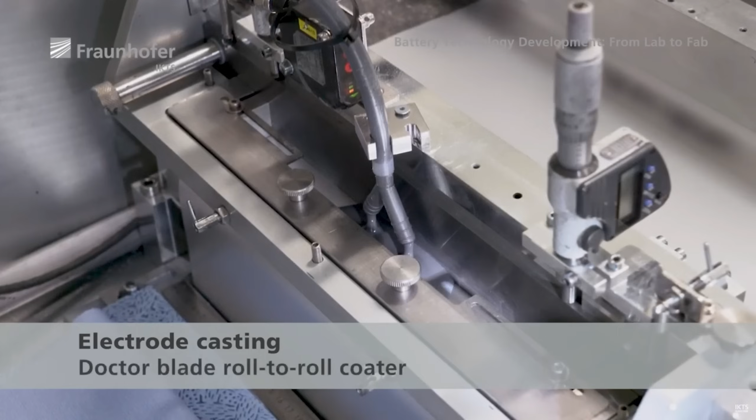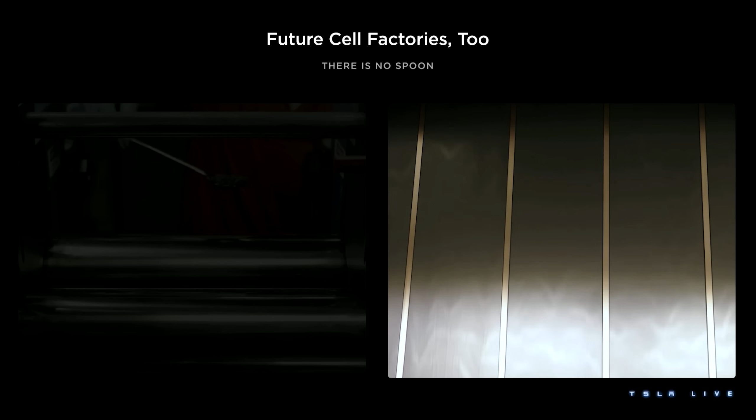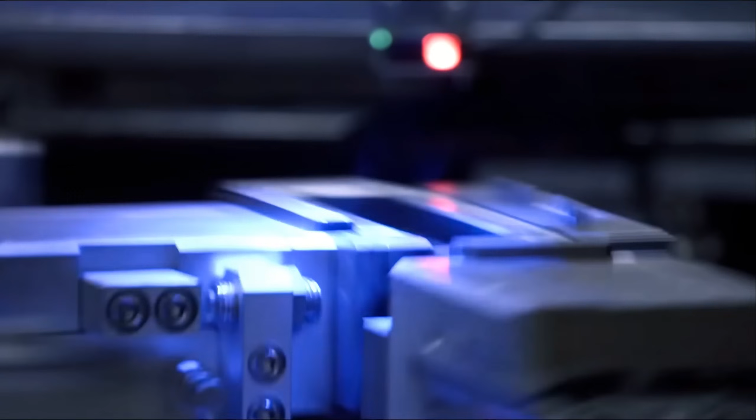Fifth, I'm assuming the LFP lines will use a wet process to coat the electrodes with active material, because that's what CATL uses. If they do, my guess is that it would be a temporary crutch while Tesla learns to produce prismatic LFP cells and masters the dry coating process with the 4680. Then, for future lines, they could deploy equipment for dry-coated prismatic LFP cells. So the good news here is that Tesla's laying the groundwork for fully vertically integrated Megapack production in the US. That will pay dividends in the future in the form of supply chain resilience and lower battery costs.

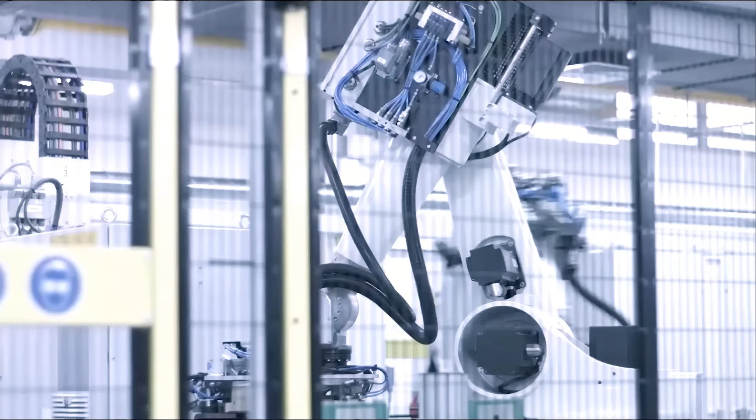The bad news is that the prismatic LFP cell production in Nevada won't contribute meaningfully any time in the next year to Tesla's cell supply for their energy storage products. Due to that, as Vaibhav said, Tesla's also been working on securing battery supply for their grid storage products from non-China-based suppliers, but it'll take time.

That last comment is a concern, because if the tariffed battery cells are prohibitively expensive and cause a production shutdown, it would mean Tesla loses out on about $1 billion per month of revenues. Thankfully, later in the call, Karn provided some reassurance when he said, quote, "The recent tariffs do pose some challenges to Tesla Energy, but it's something we've been anticipating and we should be able to resolve in a timely fashion." End quote. The question is, what is Karn's definition of timely?

I don't think anyone, even Tesla, has a precise answer to that question right now. But if the tariff chaos continues, it's worth bracing ourselves for lower revenues and/or profits on energy storage products in upcoming earnings calls. Let's just hope that, as Tesla's indicating, it's short-lived.

With battery constraints out of the way, let's move on to Tesla's battery materials supply chain. First, Elon reinforced that Tesla's the most vertically integrated car company since Ford was mining their own iron about 100 years ago. Tesla has both a lithium refinery coming online this year in South Texas and a cathode refinery in Giga Austin. Elon said that the lithium refinery will be the largest in the world outside of China, and it has room for expansion. How big is it?

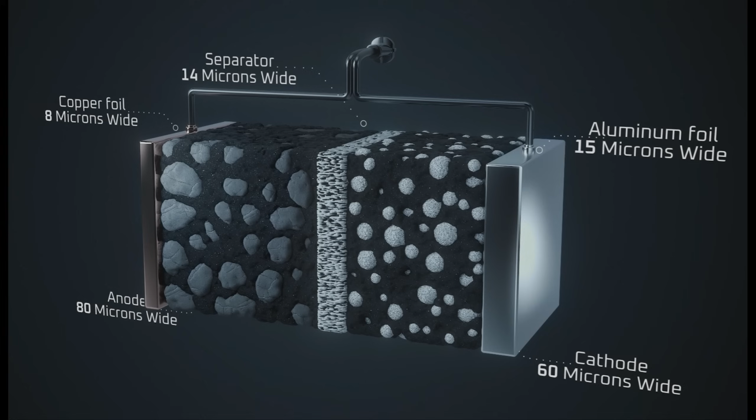The anode refers to the graphite-coated copper foil that stores lithium ions when the battery is charged. Elon is saying that we should ditch the graphite and plate pure lithium metal directly to the copper foil. However, it's going to be 5 years or more before that technology is mature enough to meet all the demands of Tesla's battery cells. Maybe Tesla has something up their sleeve, but it's not likely given that in the earnings call, Elon said they better have the anode to make the cell.

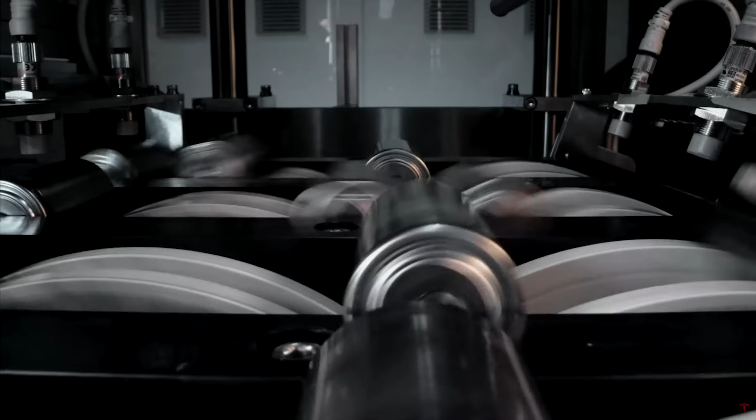The third key point was that Tesla has spent the last 2 years multi-sourcing every component from at least 2 different countries for their in-house 4680 battery cells. Given that China has a monopoly on cell components, that would have been a grueling process, but worth it because it means that Tesla's in-house 4680 production is highly insulated from supply chain shocks. That is, unlike the battery cell supply from vendors, it appears that Tesla's 4680 supply chain is already completely decoupled from China.

The fourth key point was that Tesla's 4680 is the lowest cost per kilowatt hour of any of the cells that Tesla purchases from suppliers in the US. This is something that Tesla said before, but it's worth reinforcing because after 5 years, Tesla's starting to deliver on the promise of Battery Day.

Bonne Eggleston followed up on Elon's cell cost comment with what was, in my view, the most exciting comment in the earnings call for battery nerds. He said, quote, "The plan this year is to really build off that base. Getting to the lowest cost is the hardest challenge for cell manufacturing. It's relatively easy to build a flashy product that does one thing well. To build something at high volume, low cost is super difficult. And we're kind of using that as a base then to build off and add performance in different areas for new products coming out." End quote.

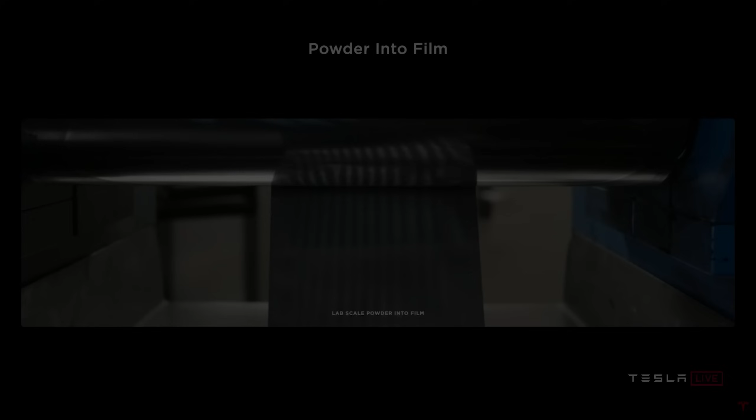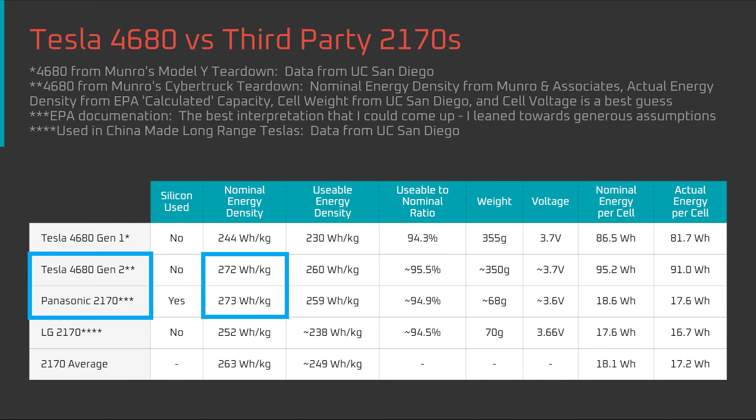That is, Tesla has been 100% focused on getting their dry coating process working, scaling the production of the 4680, and driving down costs. That means they haven't yet started to focus on pushing the performance envelope. Given that the 4680 is already on par with the best high-volume battery cells on the market in terms of energy density, and Tesla can produce them cheaper than they can buy battery cells from Panasonic at Giga Nevada, that's impressive.

What happens when Tesla starts focusing on performance improvements to charging speed, energy density, and cycle life instead of just solving problems with the manufacturing process? There's a good chance that they're going to be producing the best all-around battery cells in the world at the lowest cost.

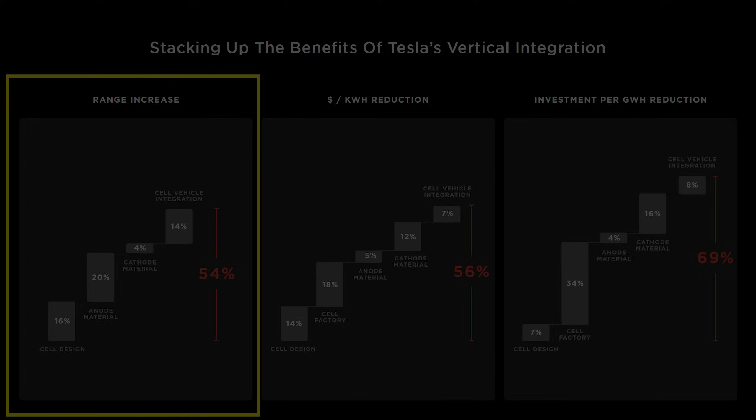That's what they teased at Battery Day, but it's been a winding road. While we're on the topic, how is the ramp of the fully dry 4680 coming along that was announced last year? We don't know yet because for the third quarter in a row, no one has asked about it on the earnings call. However, Bonne recently did an interview with Munro where he said that they've achieved a lot, and they have more to say on that soon.

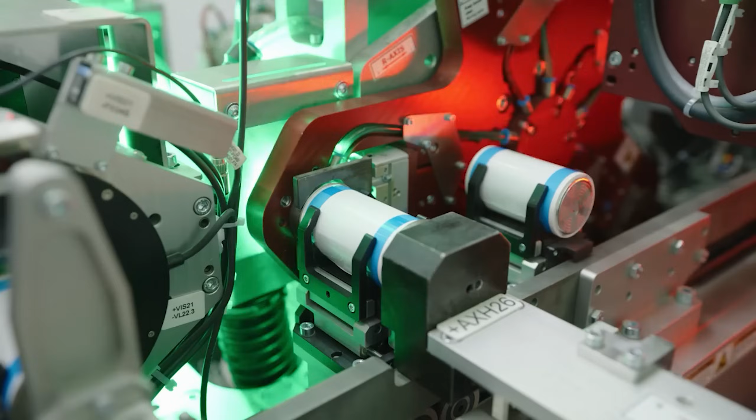My view, which I've shared the last 3 earnings calls, is that I don't expect the production ramp of the fully dry 4680 to really start moving until the middle of this year. That's because Tesla planned to start production of that cell in Q4 of last year, and battery cell production ramps don't really see the needle move much for the first 6 months or longer.

As a final note, Lars accidentally let it slip on the earnings call that Tesla is working on Ferrite motors. He said, quote, "And as we've mentioned in the past, we're working on Ferrite motors for some time." End quote. To my knowledge, Lars has never said that Tesla was working on Ferrite motors, meaning motors that use Ferrite magnets. The only thing we knew up to this point was from the comments at Investor Day, where Tesla simply said they were working on rare earth-free motors. It was a mystery what material they were going to use.

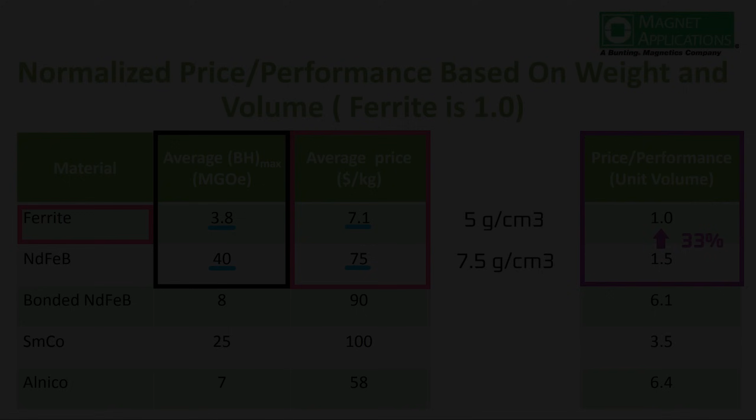Well, at least for those who didn't watch my Ferrite motors video. In that video, I said that my bet for the rare earth-free motor was on Ferrite magnets, so I'm glad to see that turned out to be correct. Ferrite magnets are made from iron oxide, so they're super cheap and abundant, but it's difficult to make a high-efficiency, high-power density motor with them. That's because ferrite magnets are weak and have a tendency to demagnetize. But it's possible to overcome those challenges with great engineering and software that can accurately model the magnetic fields of the motor, which Tesla has.

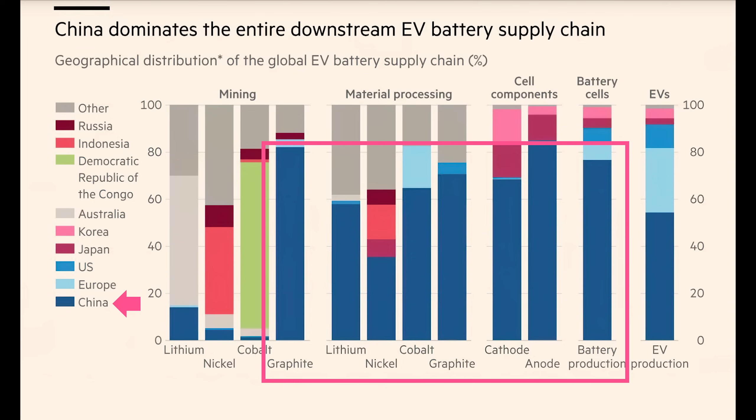In summary, I've said for years that one of the most strategically important actions for Tesla was to break their reliance on cell supply from China because it's a huge vulnerability. While the 4680 was exciting from a technical perspective, it was necessary from a risk management perspective. Now, Tesla's foresight is paying huge dividends. The 4680 battery supply chain rests outside of the hands of the Chinese monopoly. For their grid storage products that aren't suited for 4680 cells, Tesla has been working on in-house production of prismatic LFP battery cells and strengthening their non-China battery supply chain.

So, although the recent tariffs have been a difficult broadside, it's a difficult situation rather than what could have been a devastating one. Tesla has plenty of cell supply for their vehicles, and the disruption to cell supply for their energy storage products should be temporary. Either way, as a result of the trade war, we can expect Tesla to place even more emphasis on their U.S. battery supply chain, further vertically integrate it, and expand it. That will set Tesla up as the only alternative in the world to the Chinese battery supply chain. That's impressive considering that they've developed their supply chain as a company rather than as a country.

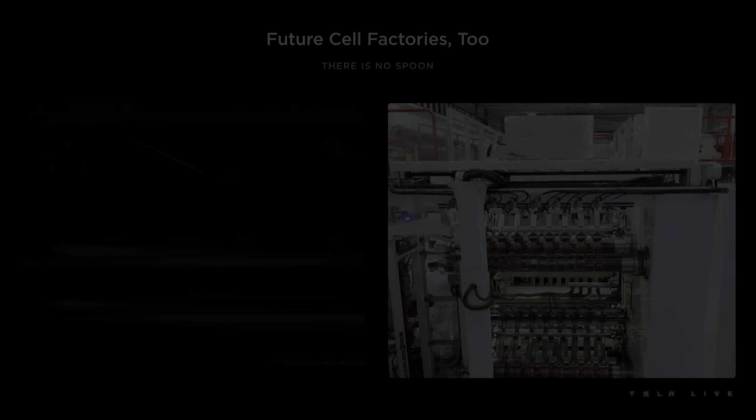Yes, the ramp of the 4680 cells themselves has had challenges, but even without the dry coating process working for the cathode, they're the lowest cost cells available in the US, and they still have great all-around specs versus the competition. Some people will of course point out that the 4680 doesn't have the ridiculous charging speeds that some companies are achieving, but that's not the focus right now. As Bonne said, and as I've said many times, with batteries it's easy to do one thing well. When Tesla finally has the fully dry cells in production, which my guess is still very early in the ramp, then they can finally start focusing on specs like energy density and charging speed.

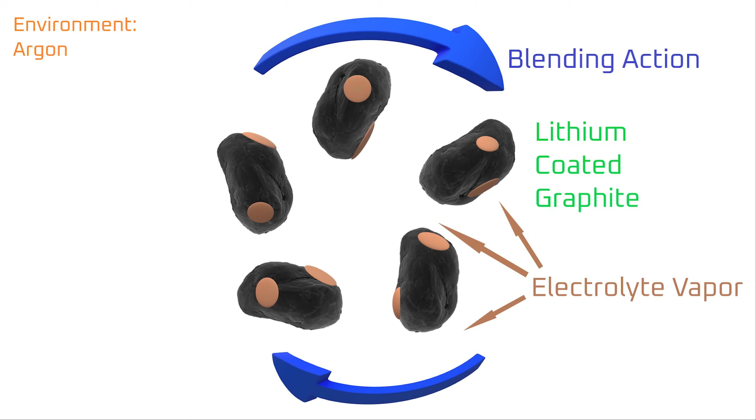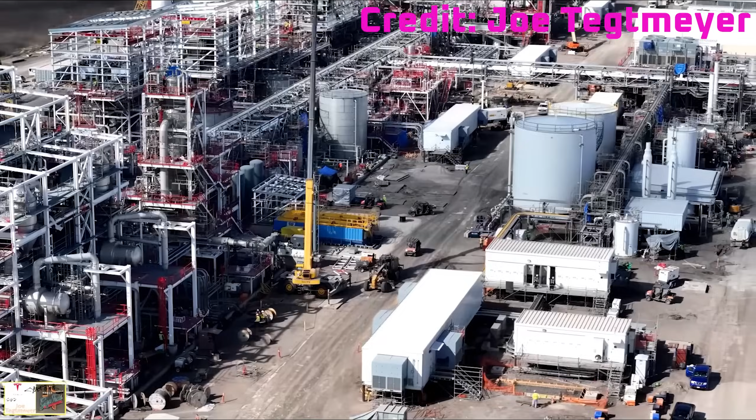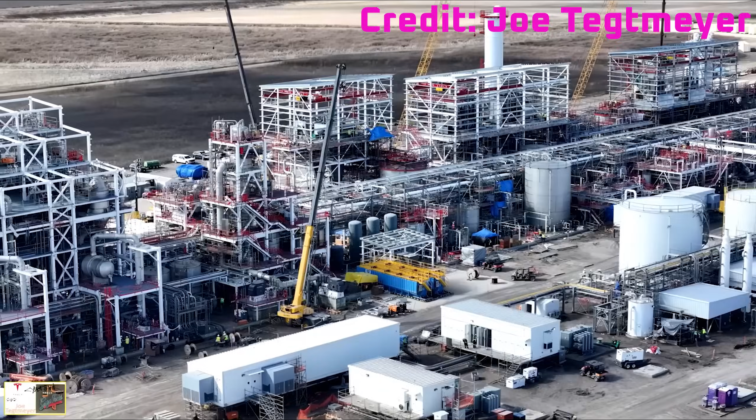Based on what I've seen in Tesla's patents, I'm certain the engineers at Tesla are just as excited about pushing the performance limits of lithium-ion batteries as we are. But that's dessert, not the main course. Tesla has single-handedly built a battery supply chain that will not only benefit the company, but the US and the Western world. That's important because batteries are going to be a key factor in our prosperity in the coming decades, because they'll be critical to providing low-cost energy, which affects the cost of every good and service in the economy. So thank you to the team at Tesla for massively increasing the odds of a prosperous future.